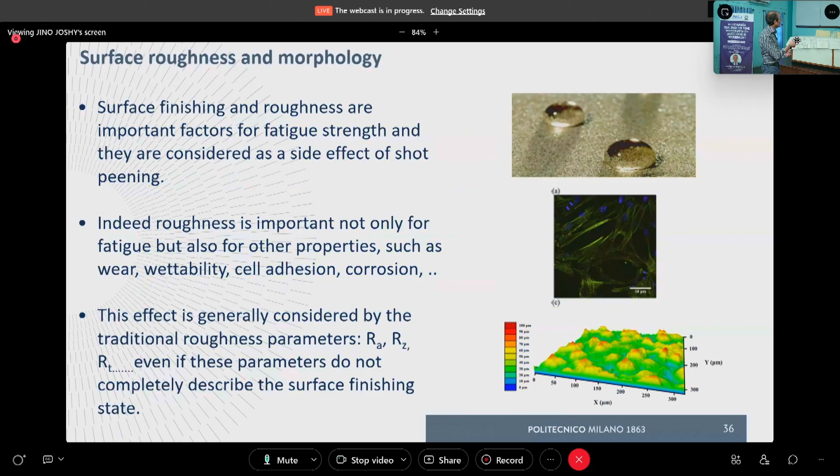Okay, let's see what we have done about surface finishing and surface roughness. The first thing we did was develop a finite element model aimed not only at residual stress calculation and estimation, but also at estimating the expected surface roughness.

This is much more intriguing. Why? Because when we perform a finite element analysis, the surface deformation is related to shot peening physical parameters, but also to the choices made in the finite element simulation. We have different kinds of finite elements with linear or parabolic shape functions, and the deformed shape, especially at small scale, will be affected by the type of element used, the mesh density, and so on.

That is to say, using the finite element results in terms of displacement and displaced surfaces is not enough; we need an accurate estimation. We developed this tool based on Abaqus modeling and simulation of multiple impacts.

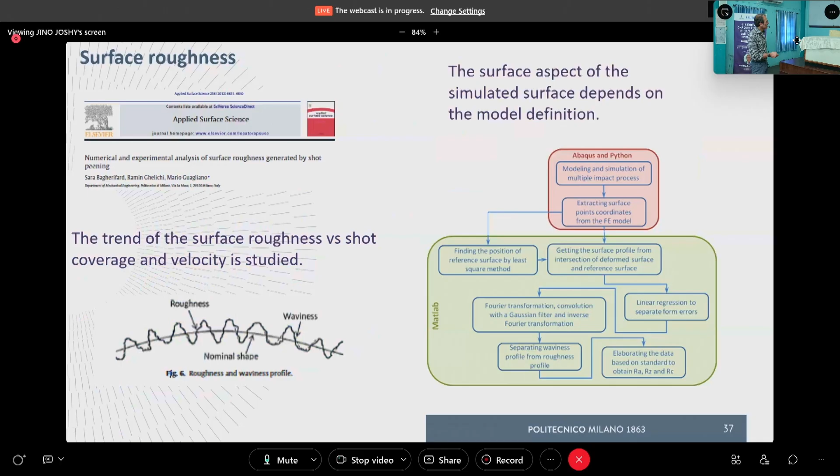Here is a smooth surface. We can distinguish waviness, which is the larger deviation from the smooth surface. And if we look at a smaller scale, you have the deviation with respect to a perfect wave - this is roughness.

Finally, we compared what we did with some experiments, obtaining agreement that is sometimes good, sometimes not so good. Anyway, it's always within 10 to 15%, no more than 20%. Considering the difficulty of this kind of calculation, and that it is an estimation, this is enough, and it can help correctly choose the final parameters of shot peening.

An improvement of this model can be done by considering the initial starting point. I will discuss this tomorrow about additive manufacturing, but just to anticipate: we discussed the disagreement and accuracy, but here with this model we are starting by simulating shot peening on a perfectly smooth surface, flat without any asperity.

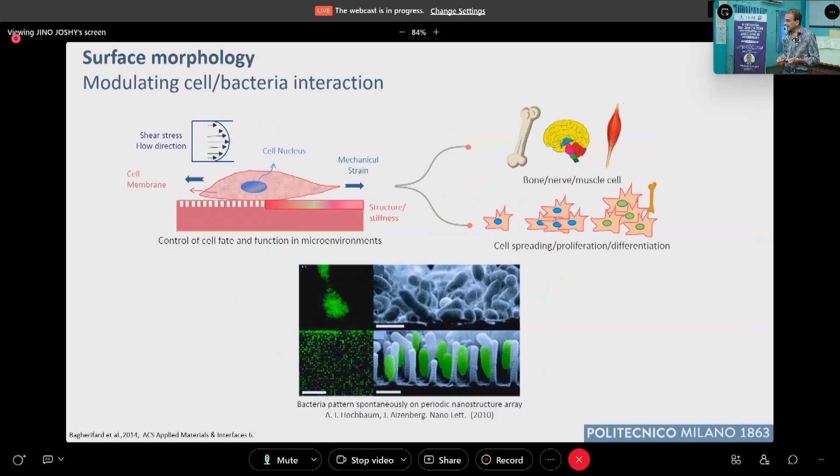Let me conclude about surface roughness and morphology by commenting on some study we have done in the field of biomedical engineering. The surface is the interface between the body and the external physiological environment. Talking about orthopedic prostheses and other artificial devices used in the human body, it's important to have the right conditions to improve the integration of the artificial device in the human body.

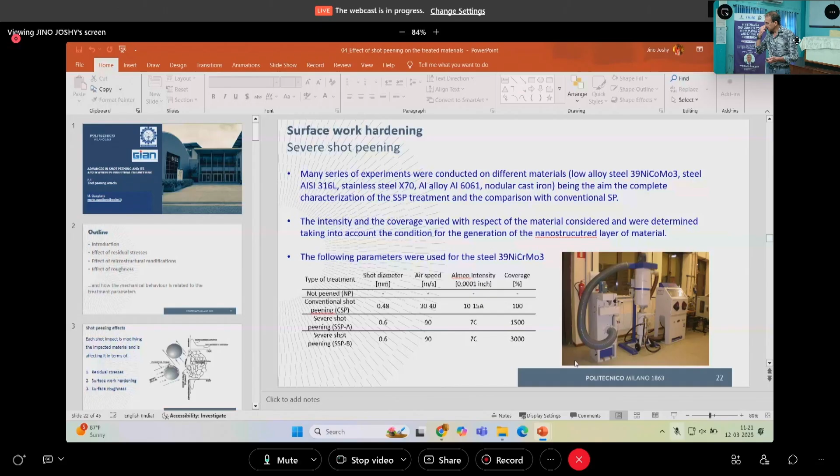Any question? Yeah, there is a question. Thank you.

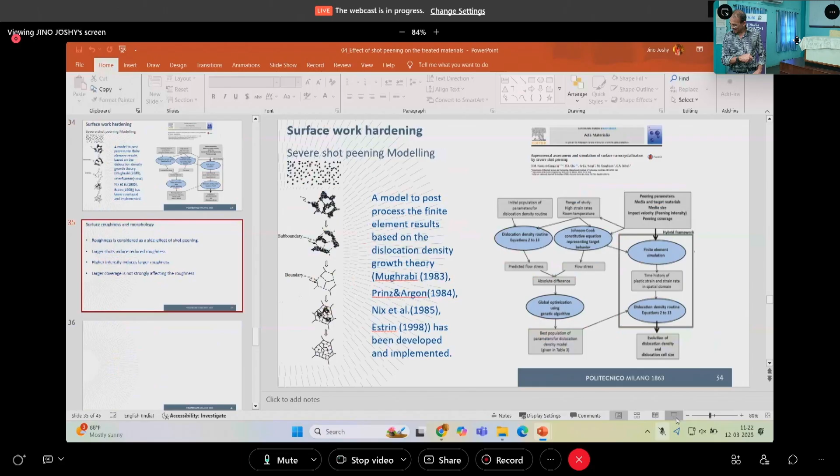In this case, slide number... the previous slide, sir, that wettability. This one? No, that wettability, sir. Wettability angle. Up. After that. Up.

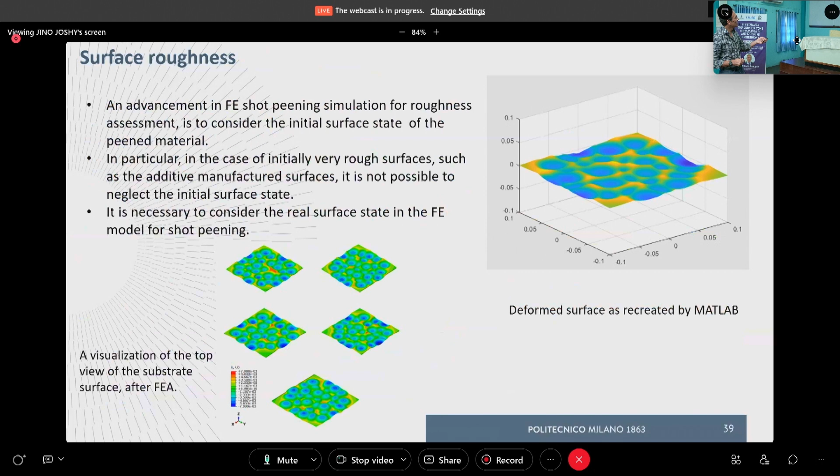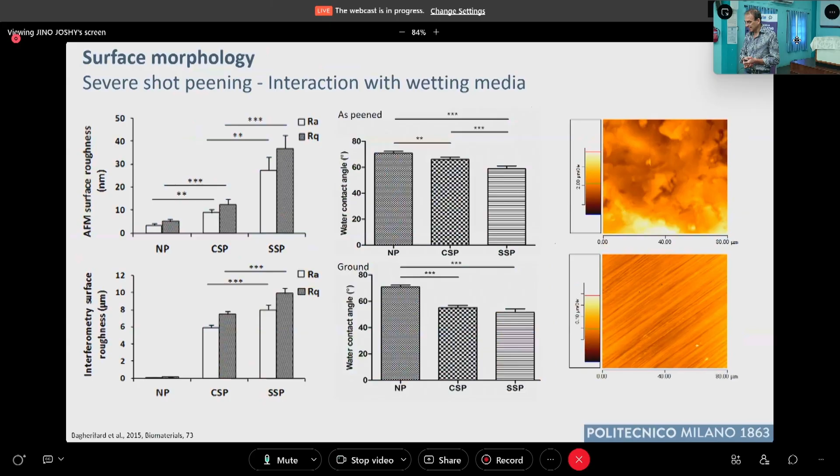Wettability, yes? So here actually higher roughness gives lower contact angle. Am I right, sir? Here the SSP is having higher roughness, and yes, in this case we obtain this result, and it gives lower contact angle. And lower contact angle means good adhesion. Yes, indeed, the drop is spreading more, and this is related to the result I showed in the other slide.

But higher roughness also means less fatigue life, no sir? How do we compromise these two conflicting factors? Indeed, we must find a trade-off, something that makes possible a better bone integration to the human body that at the same time is not causing a strong decrease in the fatigue strength. But it's important to notice that if we perform severe shot peening and then ground the surface to smoothen it, the water contact angle remains almost the same. So in this case we are improving fatigue too.

There is one more: cell interaction and bacterial interaction, how is that done? Indeed, cell interaction is good if it's positive. If the cell adheres, this is good because it means the integration is going faster. Bacteria we don't want — we want this to be slow, or even possibly avoided, because this is the main cause of infection. That is correct, and having an antibacterial surface can avoid the use of antibiotics. It is important, especially during the first period of implantation.

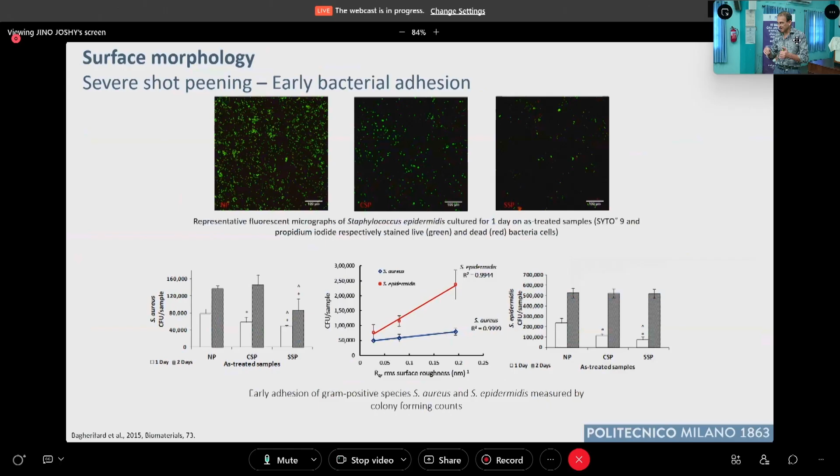These are the bacteria that are used: Aureus and epidermidis. These are for the skin and for some others, but gram-positive bacteria — they are gram-positive bacteria. I'm not an expert on this. Okay sir, thank you very much. You're welcome.

Sir, again in that cell-substrate interaction slide, can you show that one? Cells — this, the previous one. Yes sir. In general, from the studies, what we could make out is when you increase the surface roughness, normally the cell adhesion would be more — if roughness is more, cell adhesion is more.

But from the second graph shown in the middle of the slide, we can see that cell proliferation as well — roughness is an important parameter, so if roughness is more, proliferation should also be significantly more. But in that particular graph, for a time period of 3 days, cell proliferation is more for NP compared to SSP. Similarly, even for the 5-day period, there isn't much difference between cell proliferation for NP and SSP.

But previous studies show that when the surface has more roughness, it should have a drastic change in cell adhesion, cell proliferation, cell attachment — all these aspects. So indeed, this could be considered as some kind of conflicting result.

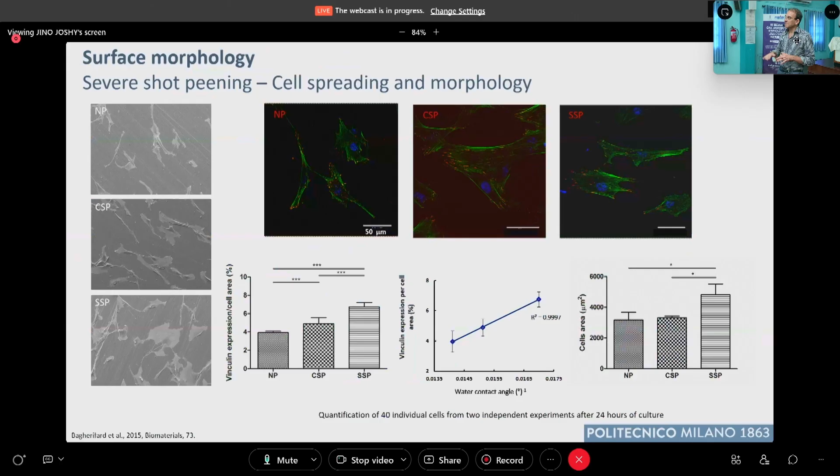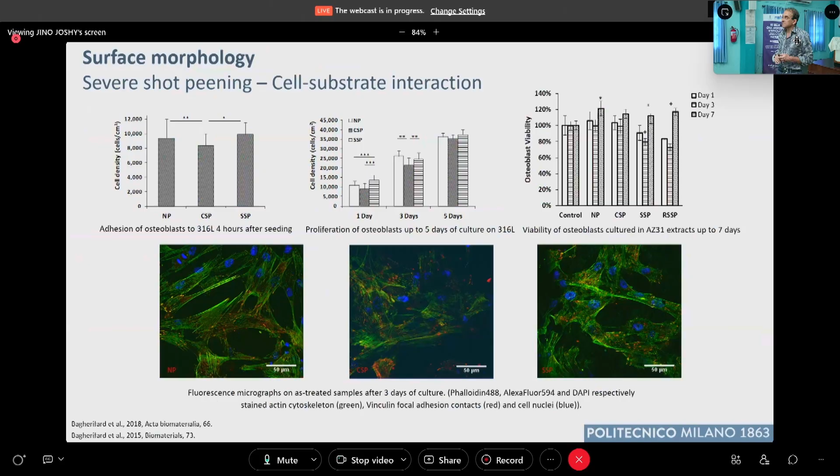And anyway, in this case, after 7 days everything is a bit more level, the differences even out. But maybe I'm totally wrong — my understanding is that even that small variation is not what we should see. We should actually see a very drastic difference, because surface roughness for SSP is anyway more than NP, so there should be a drastic change in the proliferation of these cells.

Maybe, but even the cell line used matters. Indeed, if we talk about biological properties, there are many variables that play a role, and not all of them are considered. We would need a much finer result to fully understand this.

What we can say is that there are some results where your comments are fine, but on the other side, from another point of view, the positive effect of severe shot peening is also evident, even more for bacteria, especially after short time. The effect of reducing bacteria, in my opinion, is the most important result from this study - the ability to reduce the probability of infection in the first stage after implantation of the prosthesis.

But anyway, these are in vitro studies, of course, so the way to go to in vivo studies and to practical application is a long way. Okay, thank you. Thanks.

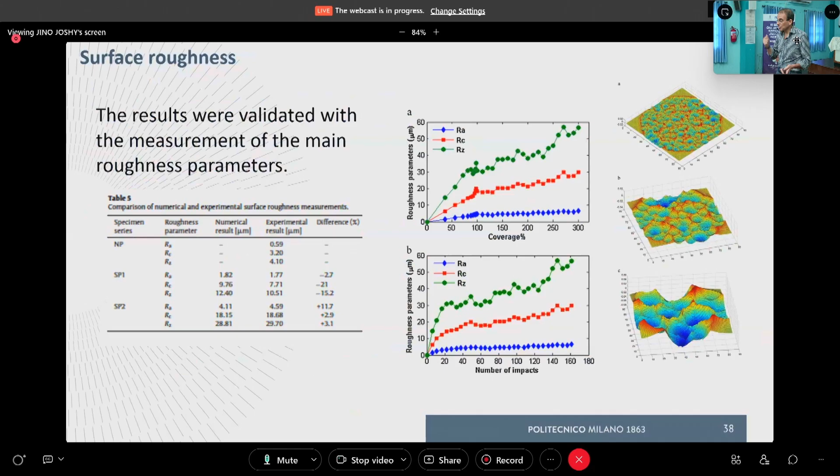To get more accurate results in terms of roughness, if the initial conditions are not the right ones, the final result will be influenced. It's true that, as I said, if the initial surface is quite smooth, probably the effect is negligible - if it's mirror-like, it will be negligible.

If we consider additive manufactured parts, the initial state will be quite different with respect to a smooth surface, and we must consider the initial surface state. Otherwise, the final result will not represent the situation after additive manufacturing and after shot peening - we need to represent both steps. But for traditional processing, like grinding or milling, I agree that probably this effect is not the most important one. Thank you, sir.

Okay, let's move to the next. No, you have a question. Sorry.

So my question is regarding these roughness studies - I think all these studies are more focused on 2D roughness parameters, right? RA, RZ, RT. So I was thinking, if you are considering 3D roughness parameters like SA, SZ, it would give more relation, it would be closer to the actual surface, right?

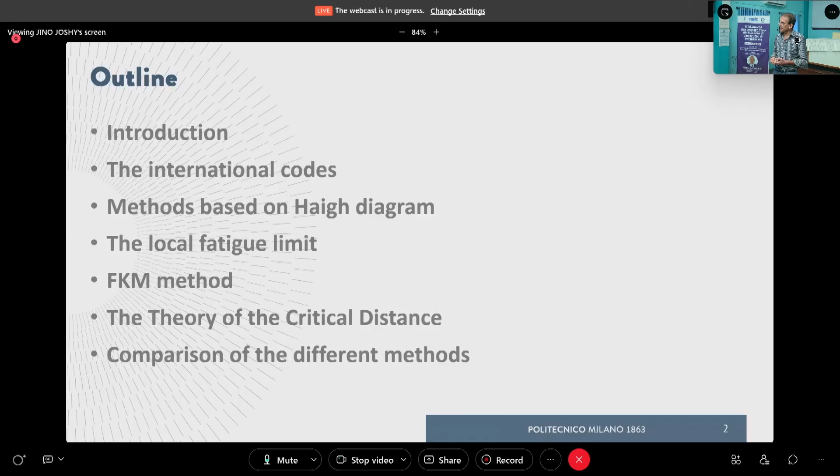So what I'm doing now is introducing the subject. Then I will introduce how the international codes related to products, especially gears, consider the improvement from shot peening - how, according to the international code, the different behavior in fatigue induced by shot peening is considered. Then I will comment on the methods that are based on the Haigh diagram, and then more in detail, the local fatigue limit method, and the FKM method.

What is FKM? FKM is the acronym from a German standard for fatigue design - the name is in German and it's too complicated for me to pronounce correctly, so it remains FKM. And then the theory of critical distance - a fatigue design method introduced by David Taylor at Trinity College Dublin, which can be used for considering shot peening. Finally, based on some experiments we did, we will compare the predictions, the assessment of fatigue strength that we can get using all these methods.

Okay, let's introduce now the subject.

Shot peening is able to alter the behavior of the treated part under many possible service conditions. Fatigue strength, fatigue endurance, but not only fatigue - stress corrosion cracking is also influenced by shot peening, as well as corrosion fatigue, fretting and others. As regards design methods that consider shot peening, fatigue is the field where most of the work has been done. Due to the importance of fatigue and the wide application of shot peening in fatigue, the main achievements in design methods have been found in fatigue design.

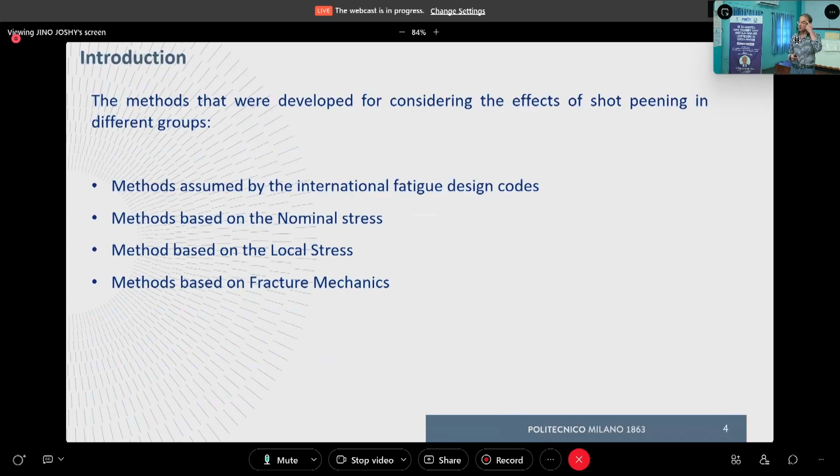The method based on nominal stress or local stress. What is the nominal stress? It's the stress that you can calculate using theoretical elasticity theory, theoretical formulas. Local stress means we are able to calculate the stress at the most critical point by means of some tool, finite element tool or some other, and also methods based on fracture mechanics.

That is to say, we are considering somehow the presence of a crack and the possibility to stop the crack while it is propagating. The method of critical distance developed at Trinity College belongs to this last category. But first, let me introduce again the effect of shot peening.

Again, I have already said, maybe more than once, that the effect of shot peening is more relevant if we apply it to a notched part. This is due to the stress gradient.

Here we have another visual, graphical demonstration of this. What is represented here is a typical residual stress field in a smooth cylindrical bar - it could be different - that is compressive on the surface, along the external surface, and then tensile at the core.

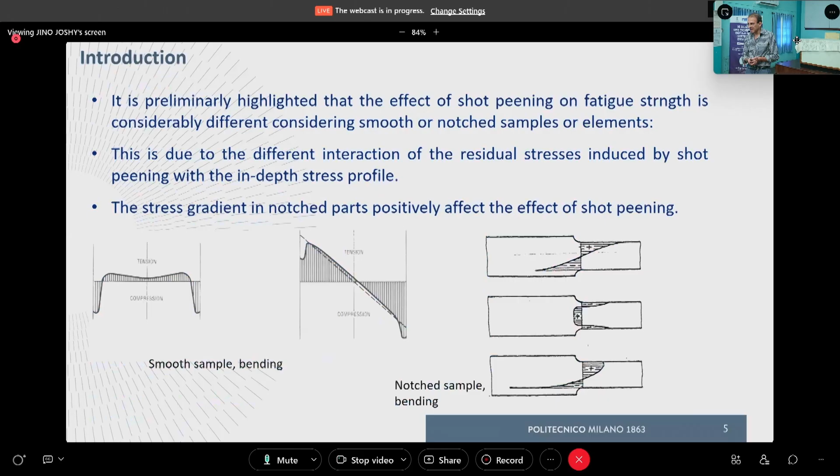If we consider a notched part, we can see here this is no longer a linear trend of the stresses due to bending. The gradient is steeper. Here is the residual stress trend, and we see that after the superposition of applied and residual stresses, we have a much more effective compressive residual stress. So the stress gradient in a notched part positively affects the effect of shot peening. Just to remark what I already said.

And then let's go to the international code. I'm considering especially the gear code, some American code, AGMA - the American Gear Manufacturer Association code. What do these codes say about shot peening? Bending fatigue resistance increases about 25% due to shot peening. Is that enough? Is that good? What do you think? It's very generic. Probably yes, indeed.

It's good that it's approved that there is a positive effect of shot peening on gear bending fatigue strength. About 25% is a bit generic, but it is what the code states. They cannot say 50%, they say 25%. Why? Because if shot peening is well done, this is at least what you can expect, the minimum result. They don't say anything about the parameters of shot peening you should use to get this result, the intensity, the coverage, and so on.

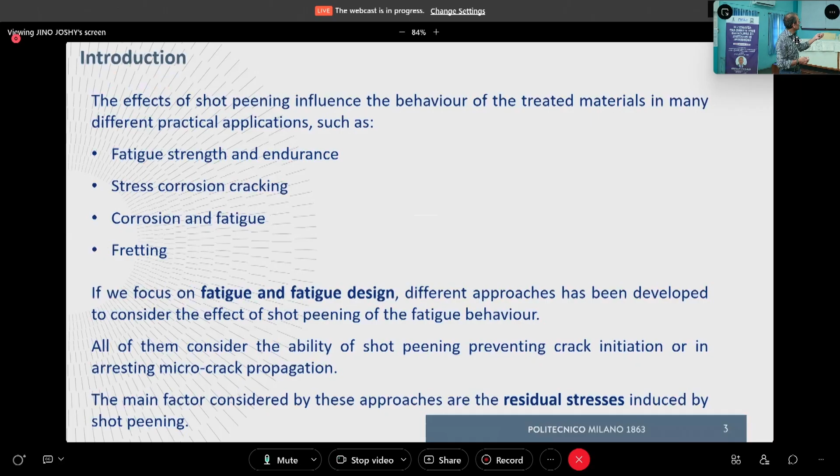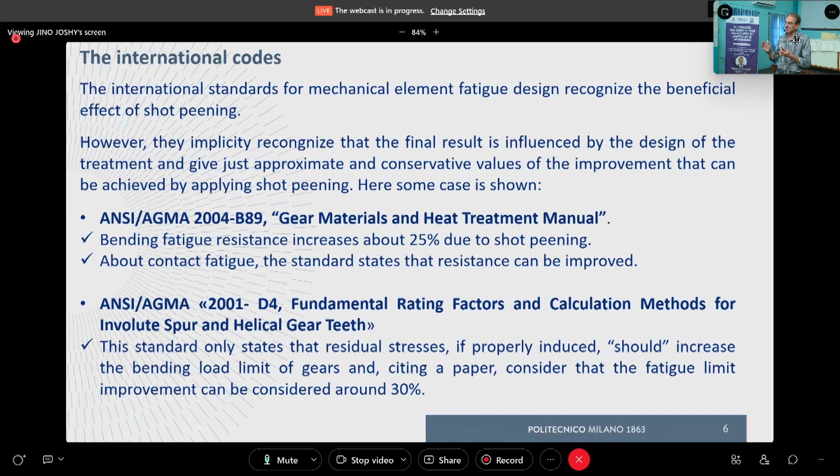Anyway, this recognizes the opportunity—this is not referred directly to shot peening, but the opportunity to develop some treatment able to induce compressive residual stress. There is another standard, the International Standard Organization, ISO standard, that also considers shot peening, for the calculation of tooth bending strength. So we are referring to bending fatigue in this case. They indeed, in this case...

They consider that shot peening changes not only the residual stress state, but also the roughness. And so they say that for the surface roughness factor, Y RrelT can be different if we are considering shot peened gears. But anyway, they recognize an effect of shot peening that is quite limited. And also in this case, this is because they say it depends on the quality of the material.

The last bullet point: shot peening effect depends on the quality of material and is roughly estimated around 10-20%. This is quite a conservative assumption, because we know that 10% makes sense for a smooth sample. For gear teeth, we can expect something more. But anyway, this is a code, and they are conservative about this.

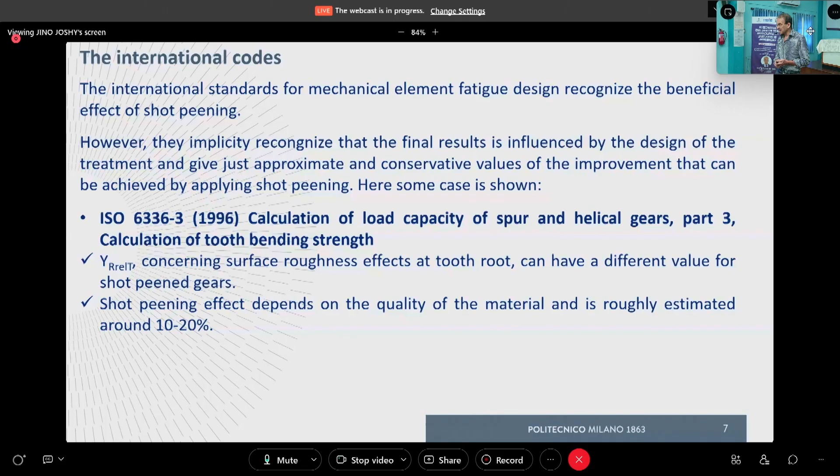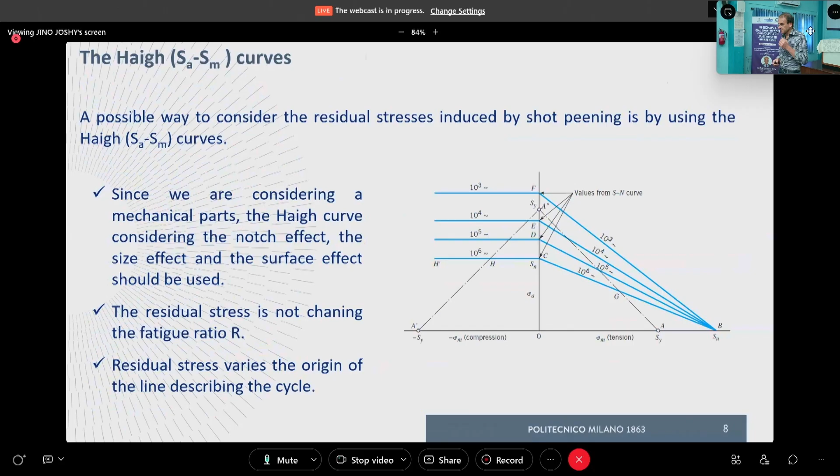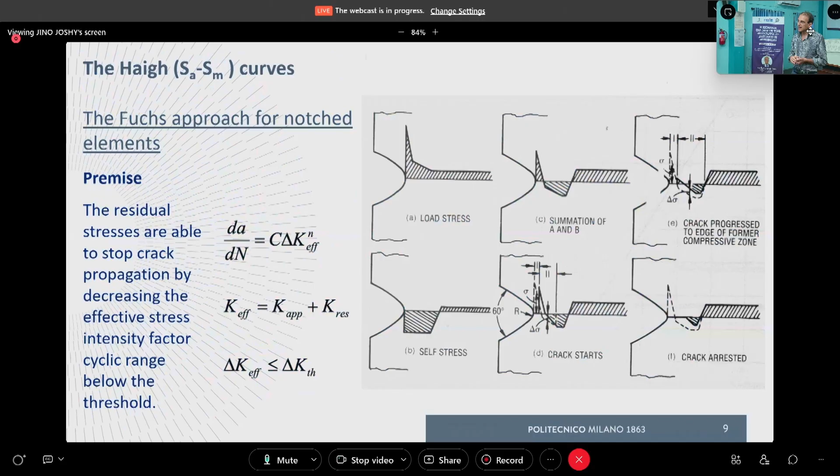We have already commented on this figure, and I don't want to comment on it again, but just to recap: even if we have a residual stress field, even if a crack is able to develop at the notch root of a notched part, it can start growing, but it will then emerge into the residual stress field. Due to the steep gradient of the stress, soon it will run into a compressive stress field that is able to stop the propagation. So we will have parts with some micro-crack that is no longer running because of the effect of residual stresses.

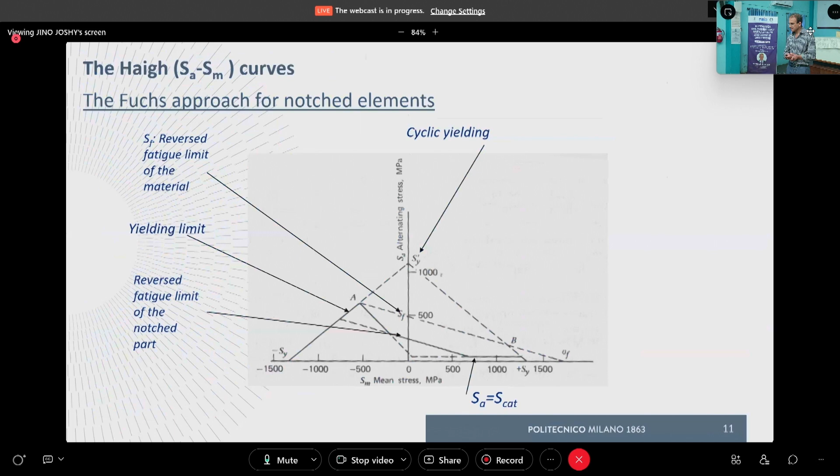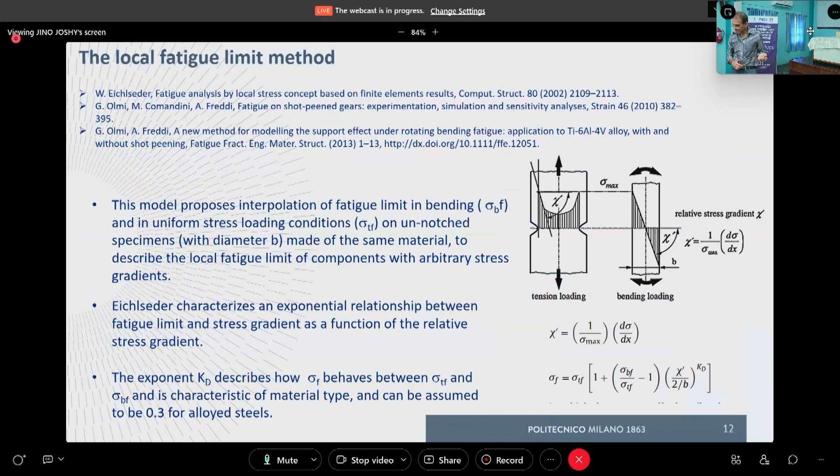By means of the local fatigue limit, we recognize that after surface treatment, the properties of the material at the surface are different with respect to the core, are increased. And we find some formula to define this increment, and then we can draw the trend of the fatigue limit by using the formula that we have adopted.

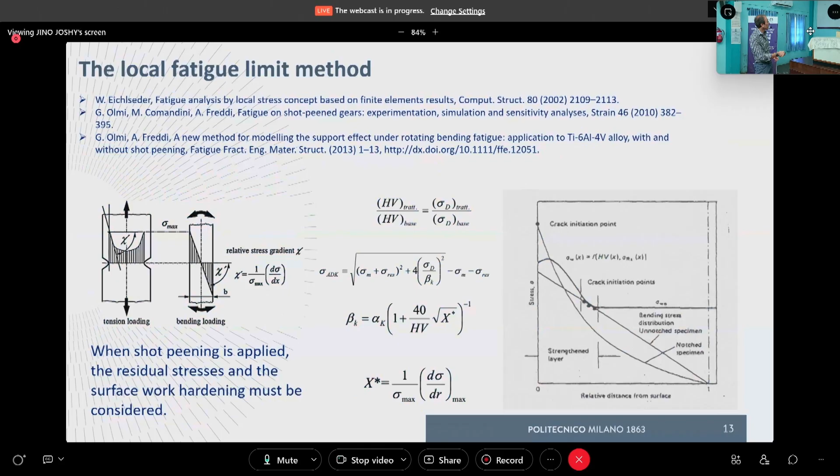Then if we superimpose to this trend the applied stresses, and if the part is smooth, we can calculate by simple formulas. Otherwise, we must use the finite element code. Okay, and then we can draw on the same graph the applied stresses and see when there is the intersection between these two curves.

Okay, this means this is a critical load according to this method. Any questions? Good, okay, let's go. The FKM method.

This is, as I said, the FKM guideline, a German guide. It is a reference for the design of mechanical components. They consider two different methods, both the nominal and the local stress method. Nominal means something similar to the Haigh diagram or Fuchs approach, that is, we are using nominal stresses. Local means the previous one, the local fatigue limit approach.

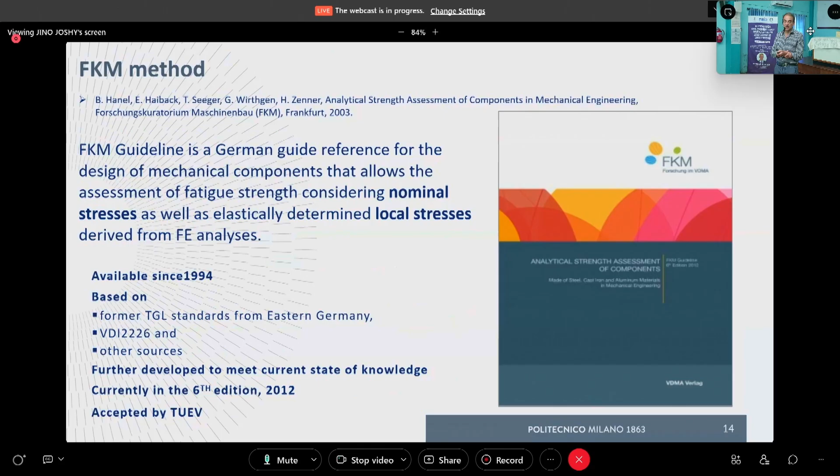FKM is not an official code, okay, but it is widely used when you have to prove with some report that what you have done in terms of fatigue design is correct. If you refer to FKM, it's generally well accepted. It starts from the German experience on fatigue, which is recognized to be good, of course.

It's based on some other standards. We are currently at the 6th edition. To be sincere, I have not checked if some other edition after the 6th has been published, but in any case, I'm quite sure that nothing important has been changed, okay. Let's see what they say, especially focusing on what they say about shot peening.

They say that if we have to deal with fatigue, talking about the nominal stress method, we consider what makes the case of interest different with respect to the standard samples. So for the fatigue strength of the material, these are considered by means of factors, coefficient factors. So we have shape, size, type of load, roughness factor, surface treatment factor, that are considered. By specific combination of these factors, a synthetic, let's say, design factor is calculated. This K WK,zd or b.

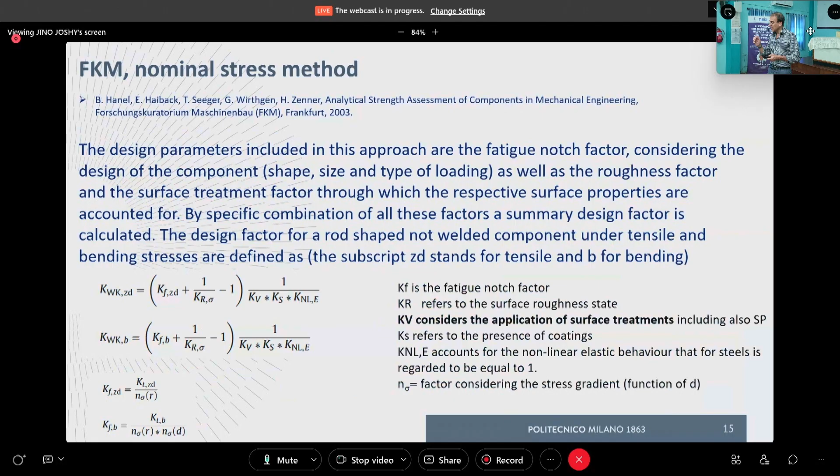N sigma is a factor related to the stress gradient, similar to the relative stress gradient factor we considered in the previous approach. This is how shot peening is included in the design, in fatigue design for the FKM nominal stress approach.

The formula here is the same. How can we consider the stress gradient? We are in the nominal stress approach field now, so how can we consider the notch? Only some kinds of notches are considered. The nominal stress approach does not want you to make any complex calculation - that is not the aim. They give you tables and graphs with common notch effects, notched geometries, and numbers related to this geometry, so that you can calculate the effect of stress gradient and the effect of n and Kf. You must refer to this factor, otherwise the nominal approach cannot be applied.

KV is the surface factor, defined also for shot peening and deep rolling. If we have not done any treatment, surface KV is equal to 1.

If we focus on shot peening, FKM considers it in a more appropriate way. If we are considering a smooth or unnotched sample, the positive effect of shot peening is in the order of 10-20%, so 1.1 to 1.2. If we are considering a notched steel component, the effect is larger, from 10% even up to 50%, so 1.5. It's up to us, our expertise about shot peening and how we have designed the treatment, to apply 1.1, 1.2, 1.3, or even 1.5, and of course it depends on the quality control we are using.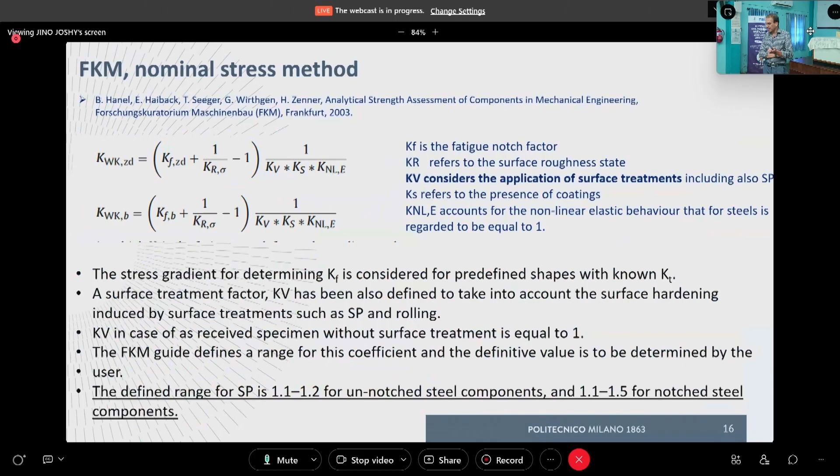Once we have determined this K design factor, for bending or for tensile load, we can calculate the fatigue limit of the part, starting from the fatigue limit of the material and dividing this by the design factor.

If you have a welded part, we can use other coefficients, or if you have a non-null mean stress, R can also be included with another coefficient.

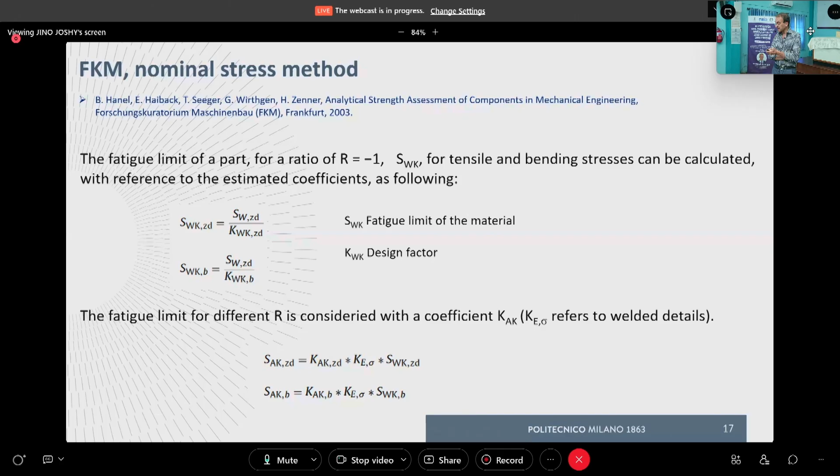If we consider the local stress method, conceptually nothing is changing. The structure of the formula is not very different. Again there are many factors, KF, KR, KV, that consider shot peening in the same way as in the nominal stress approach. But in this case, we are considering the local fatigue limit. This is much more general in terms of application, but to apply the local stress method, we should perform finite element calculations to verify and determine the real stress gradient close to the notch. The other parameters are almost the same.

So in terms of practical application for FKM, the local stress method is conceptually similar to the nominal one. Here more geometries can be used, according to the fact that we should be able to accurately calculate the stress state by means of finite element analysis.

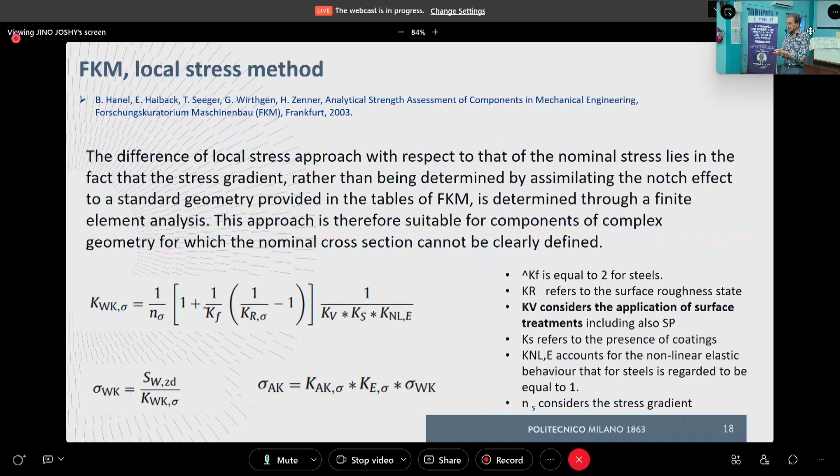And then let's go - I'm not too late. No, I can proceed. Are you tired? No. Have you any question? Yeah, okay.

Hello sir, can I ask a previous slide question? The importance of fatigue design and how it's used in industries. Sorry - fatigue design, FKM, no, fatigue design in the previous fatigue slide, and how it's used in industry, and the importance of it.

In many high-tech product systems, fatigue is the main problem, so these concepts are applied. Today they are generally applied by means of dedicated software that includes not only finite element analysis. There is complex post-processing of the results that includes fatigue damage estimation, fatigue damage criteria, and so on, to have a fine estimation of fatigue strength. The application of shot peening, if you want an accurate fatigue design, must go in this direction.

Aerospace industries, like? Yes, sure, aeronautics of course, especially because in aeronautics many parts are designed in the finite life region, so we need to know the expected maximum number of cycles that can be used before the part is going to break. Thank you, sir. You're welcome.

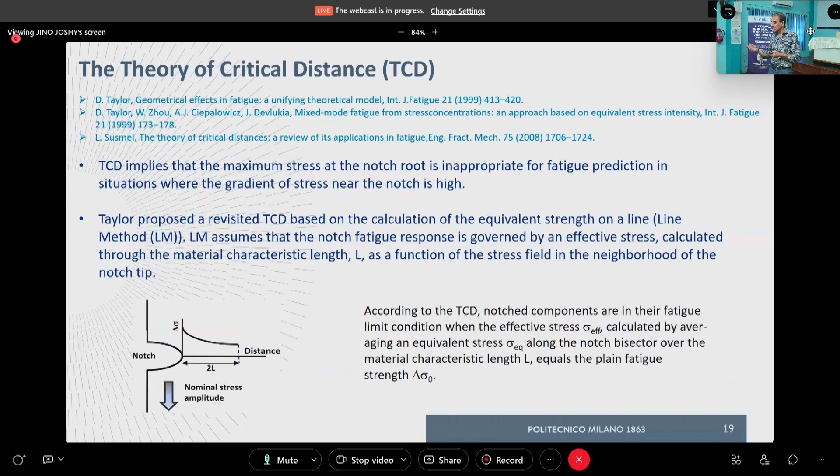The parameter we are using is the average, the integral of this trend averaged according to the length. And this characteristic length is a material characteristic that also depends on the geometry, according to the notch tip geometry. And this is the formula.

According to the theory of critical distance, the fatigue limit of the notched component can be exceeded, let's say, the effect can be determined when we calculate this equivalent stress that comes from the integral of the trend of the stress from 0, from the surface, to the critical distance 2L, of the equivalent stress in y, of course.

So SL, that is equal to delta sigma, let's say, what is it? It is equal to the average of the trend of the equivalent sigma in this critical distance from the surface.

And how can L be estimated? L is estimated according to fracture mechanics concept, that is to say, 1 over pi that multiplies the second power, the square power, of the ratio between the threshold stress intensity factor delta Kth, the minimum value of the stress intensity factor that makes crack propagation possible, over delta sigma 0, the plain fatigue limit.

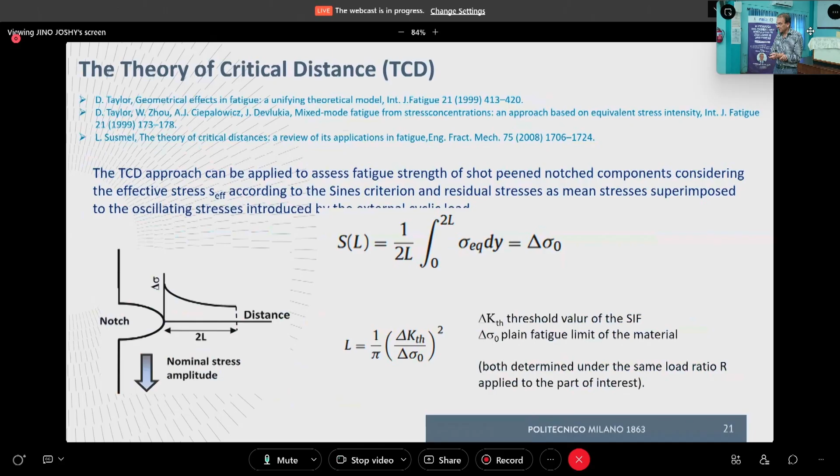And this is, from a conceptual point of view, that's all. I don't want to go deeper, just to let you know that there is this criterion that can be used.

And then let's conclude - I will not take much more time from the official end of the lecture - let's see a comparison of the different methods we used.

Indeed, we have used 3 different geometries. Here is the smooth geometry, the usual hourglass sample. This is a notched bar with a small fillet radius, with KT equal to around 2. The material is low alloy steel, 40 nickel chrome molybdenum 7, and the applied load is rotating bending.

In the second case, the material is a steel A95 according to the API code, and the geometry is quite severe - a very severe V-notch. And here in the table you see the different shot peening parameters we used for testing the different samples.

So we use the name of the series to indicate the corresponding shot peening parameter, in terms of material and diameter of the shot, steel or ceramic, and in terms of Almen intensity, varying it from 8, 10, to 12 Almen A. The coverage for the first series of samples is 100%, for the second one is 400% in one case and very light, and again 100% in the second case.

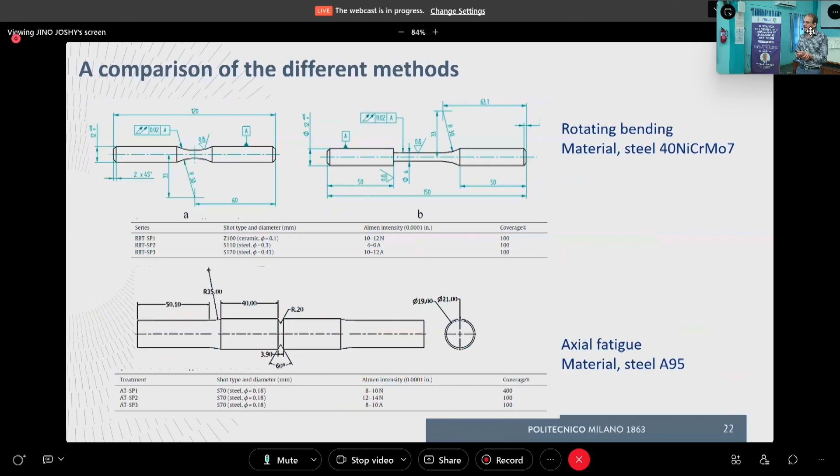We ran this test on these specimens, and then we applied different methods to the same experimental results to see, at least for this geometry, which criterion gives the most accurate result. To cut the long story short, let's see which comments we can make.

To apply the different methods, we had to modify some of them. The local fatigue limit approach proposed by the German researcher Eichlseder was modified with a corrective coefficient because it was not accounting for surface roughness and surface work hardening. By means of this coefficient, the agreement was satisfactory.

We did some finite element analysis to consider the surface stress gradient. FKM requires the definition of few parameters, so it's easier to use. This is for calculating the fatigue limit, and this is the main advantage of FKM.

The nominal stress approach categorizes different notch effects. The notches we used were among the ones already considered by the nominal stress approach in FKM; otherwise we had to calculate them by means of a finite element code.

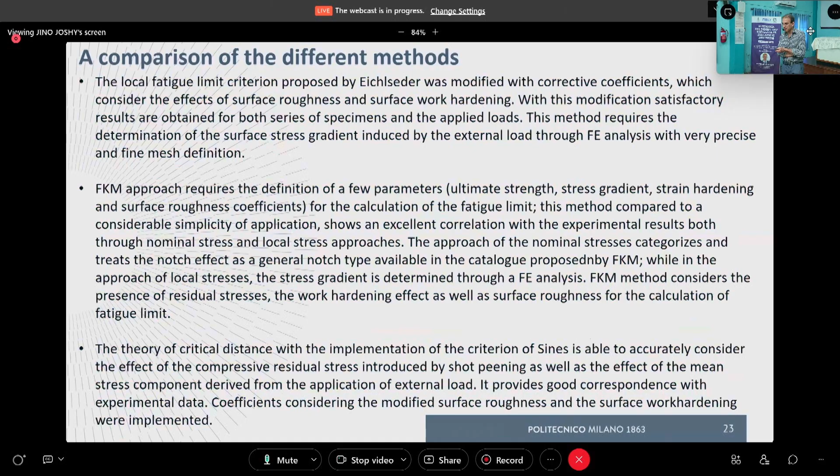For the theory of critical distance, we used the Sines approach, because if we consider residual stresses, even with uniaxial loading, shot peening induces a biaxial residual stress state. So for a final estimation of the effect of residual stresses, we had to use this multiaxial fatigue criterion.

In terms of comparison, what can we say? At least as regards the analysis we have done, the FKM approach is the best compromise between simplicity of application, a reduced number of parameters, reduced experimental and numerical effort, and the accuracy we can get.

The critical distance theory is able to provide good correspondence with experimental results. Since we are not considering the stress value at a point, but integrating the value over a line, over a finite length, the result is more robust. It's less influenced by possible mistakes or inaccuracy in some step of the procedure, especially the numerical procedure. So in terms of shot peening, it provides a robust solution to alteration of peening conditions and possible residual stress relaxation during cycling.

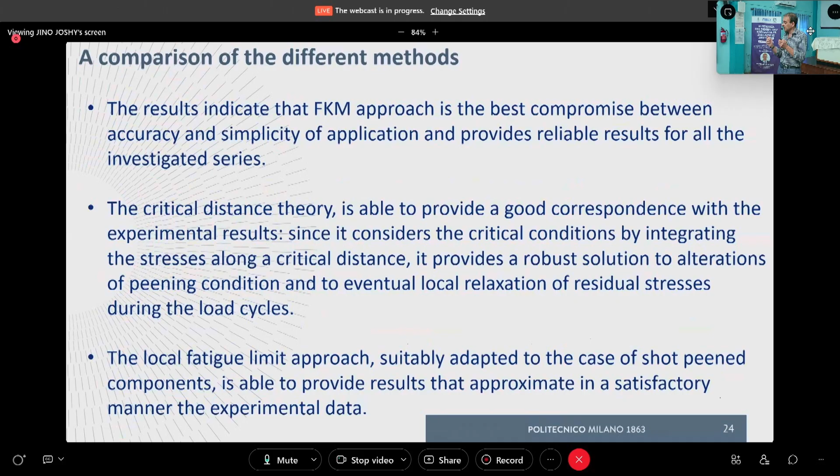The local fatigue limit approach, after the adaptation by means of the coefficient I mentioned, is able to provide accurate results. But these parameters were good for our test, for making good results, but cannot be generalized at all. So if you are using a local fatigue limit approach, it's better to consider some extra experiments to correctly address factors not directly considered in the original development of the approach itself.

And I'm here for questions, so I was able to remain aligned with the official deadline, let's say.

Any question? Now you are too tired and hungry for asking questions.

So the critical stress we are using in the earlier calculations, is that calculated experimentally or from simulations? The SCAT, indeed. This is SCAT, you mean? Yes. These are experimental and estimation, indeed, for high strength steel. This is a family, that's a rough estimation.

Anyway, for estimation of the effect of residual stresses, the same applies to the other one.

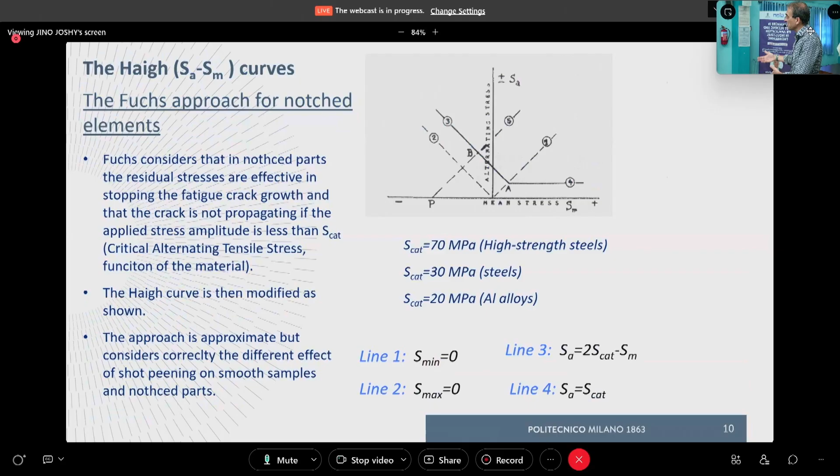So in the first method this is assumed to be zero. If this line was here, the diagram would be very severe, not corresponding to the physical damage process for fatigue. Anyway, this is an estimation.

So consider this critical state in the other method, like the theory of critical distance. We have the same stress but a different distance. Same, indeed. From a point of view, the meaning is similar, but the theory of critical distance is analytical.